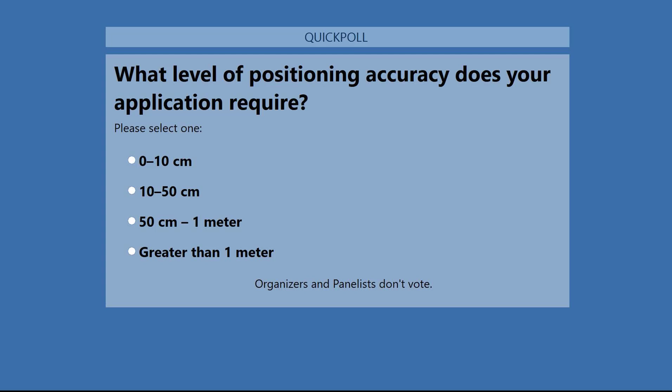Okay, looks like 55% saying 0 to 10 centimeters, 18% saying 10 to 50 centimeters, 25% of us saying 50 centimeters to 1 meter, and 2% saying greater than 1 meter. So, Alan, any thoughts here?

Well, with that commanding majority at 0 to 10 centimeters, we are in the machine control zone. That's not to say that the others with lesser requirements are not going to find plenty of valued information in this webinar. There are certain aspects of machine control also that involve the lesser accuracies, which is not to say that 1 meter of accuracy is anything to sneeze at.

Let's go ahead and hear from our first panelist. Lee Baldwin is the Director of Off-Road Autonomy at AutonomouStuff. He's responsible for creating and implementing the off-road autonomy product strategy that aligns with the AutonomouStuff mission and values. He spent the last 10 years as an engineering manager at Caterpillar, where he led development of the command and control portion of the autonomous hauling system.

Lee, we're all anxious to hear your presentation. Please go ahead. Thank you, Alan. Appreciate the introduction. So today I would like to spend about 15 minutes.

I'll talk a little bit about AutonomouStuff and its role with Hexagon. Then I would like to spend some time on onboard autonomy components in the subsystems that you'd find typically on any autonomous machine. Then I'll spend a bit of time on the perception subsystem, which is one, obviously, of the critical systems that you need in a robot, and talk about a real-world use case. This use case is going to flow through each of the speakers, autonomous hauling and mining, and lots of nuances. That was the first application, really, from an autonomy standpoint to kind of go mainstream. And then I'll finally talk about the road to production and how you would do that in the context of training perception systems.

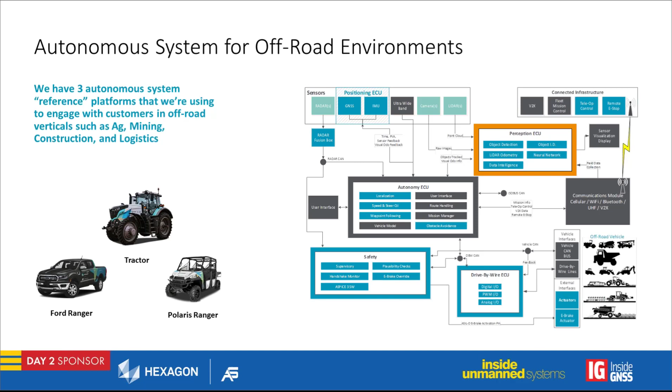So let's talk a bit more about perception in the vehicle platform. Typically you'll find some of these sensors on any autonomous machine, and depending on the use case and where it's being used, there'll be a stronger reliance on certain components. Obviously you'll find GNSS receivers and IMUs because position is very important for the autonomous machine.

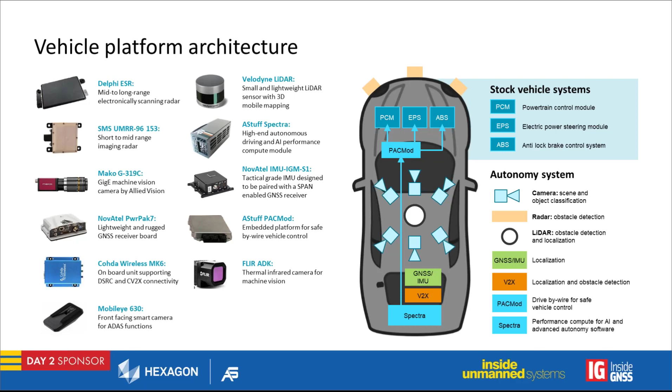But for the perception system, you'll see a variety of sensors potentially fused together. You could use cameras for object detection and categorization, but you can also do that with radar and LiDAR - depending on the environment, you may use one or all of those sensors. You'll also see a drive-by-wire system that interfaces with the machine systems and provides and gets feedback from them. So any machine, you'll see these things, and some interesting developments are with camera technology, like thermal cameras for night vision.

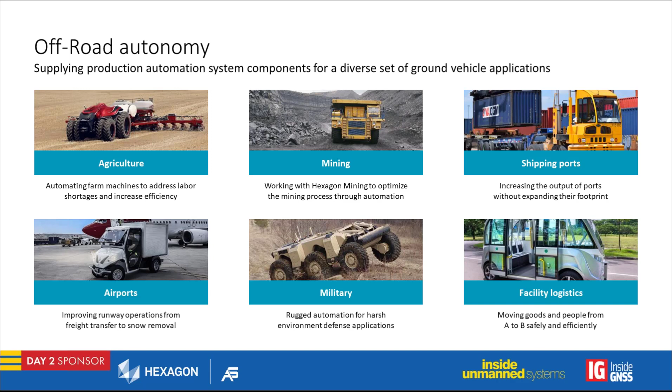Just some common components you'll see. Now for applications - we're talking about off-road autonomy today and where this is going. Obviously mining has been at the forefront. Agriculture has many startups working on robots because of labor scarcity. Shipping ports already use gantry cranes, but there's a push to automate other aspects. Airports, due to damage risks to airplanes, are automating certain vehicles around them. There are also a lot of military applications and facility logistics shuttles. One thing common to many of these, except airports, is that they can be enclosed environments.

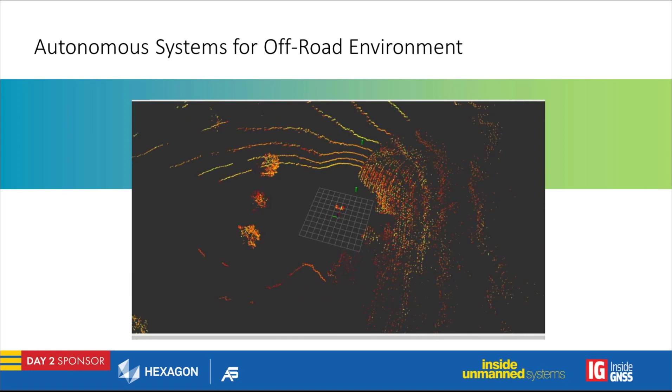So this is from an off-road environment - one of our research and development vehicles, a Polaris Ranger. This showcases our perception systems. In this case, this is the LiDAR point cloud coming out, and this is a thermal camera also used in perception.

This shows our drive-by-wire system actually controlling the Ranger with no safety driver. You'll see coming up that it stops - that's one of our engineering managers - and it will stop, avoid, automatically restart, and carry on. So that's some of the things we've done with off-road vehicles, but we've also done quite a few passenger vehicles as well.

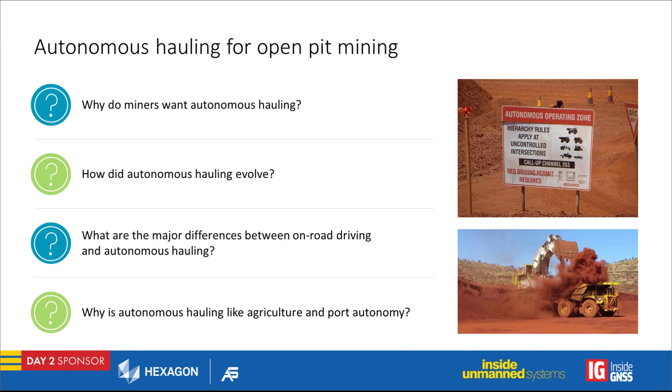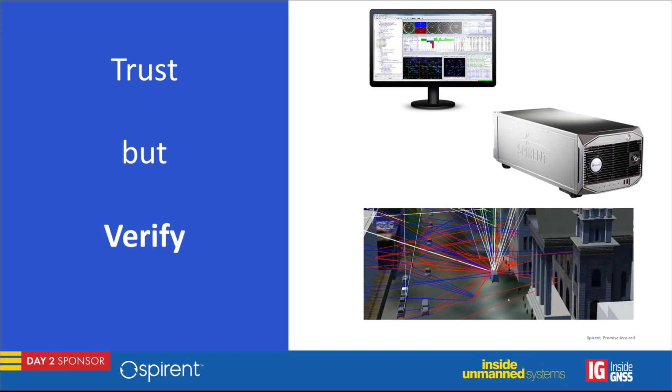So what we say here is that it is good to be aware of the receiver and sat-nav limitations, and yes, you should trust the position, but at the same time, you need to make sure that you verify that what you're getting is true.

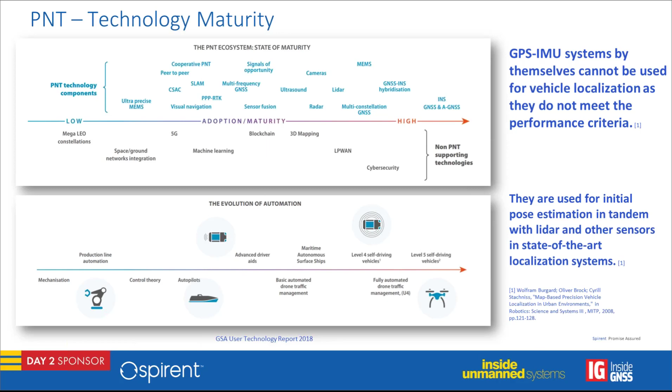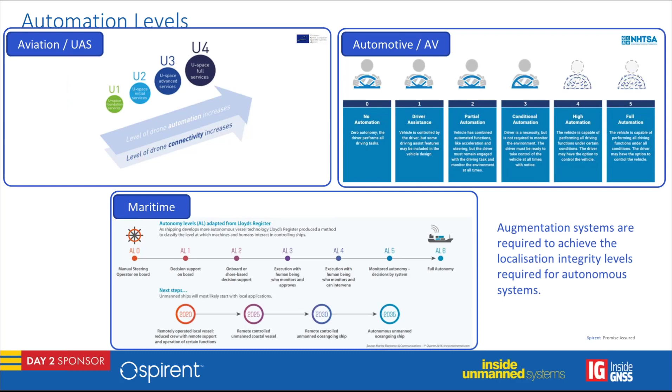In this chart, we're seeing the automation levels for different segments ranging from aviation, automotive, and maritime. What is common between these segments is that as the automation level increases, so does the system complexity. If we focus on positioning and localization, it becomes clear that augmentation systems are required to achieve the integrity levels required for such autonomous systems.

The good news is that there are already several market-available augmentation services such as RTK and PPP, or the combination of both. These compensate the satellite orbit errors and ionospheric and tropospheric delays. The downside is that such systems generally assume open sky and do not reflect obscuration, multipath, and receiver bias, which still need to be accounted for. These happen more often in dense urban environments, forests, and cliff faces. This will be discussed in more detail further on, and Ali in the second half can show you even more.

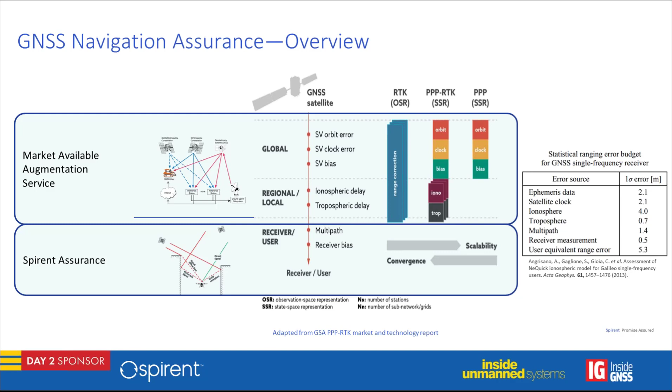As the levels of automation in vehicles increases, so does the complexity of the positioning engine. More traditionally, the positioning engine uses solely the GNSS receiver. This was eventually enhanced using motion sensors such as inertial measurement devices and odometry, and there are some very good implementations already in the market. However, this might not be good enough for certain applications, especially where environmental awareness is required for the positioning engine to assist in localization and map building.

To do so, other sensors such as camera, LiDAR, and radar also feed into the positioning fusion mechanism. This is generally required not only to have a level of redundancy, but also to improve the vehicle's estimated position with higher accuracy and the integrity required for high automation levels.

This is quite an interesting shift in the way we look at positioning and localization. The main shift is that rather than just focusing on getting a position and having humans decide if that position is accurate, now all of this has to happen through the positioning engine mechanism and the control system controlling the vehicle. As mentioned earlier, people make mistakes even when warned through signs—imagine if this system, which has to rely on the positioning available from the positioning engine, is not accurate.

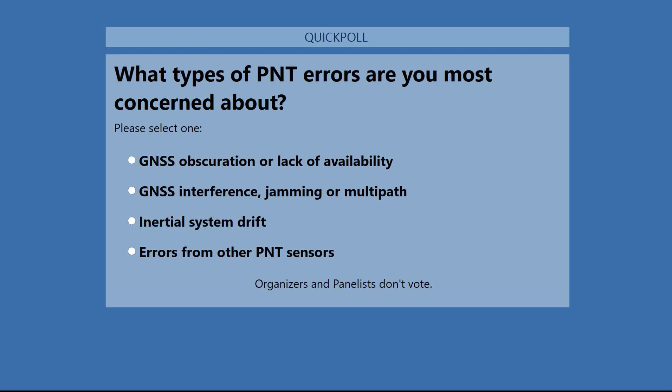Okay, it looks like 31% saying GNSS obscuration or lack of availability, 51% GNSS interference, jamming, or multipath, 15% inertial system drift, and 3% errors from other PNT sensors.

Thoughts here, Alan? Well, as I see in almost everywhere I look, whether it's at technical conferences or in private conversations with designers and engineers, interference, jamming, or multipath lead the concerns when we're talking about GNSS, followed by obscuration or lack of availability, just getting a good usable signal. Now, as you combine it with inertial, you have to govern your error budget in that respect as well, but it appears to be of less concern, at least at the moment.

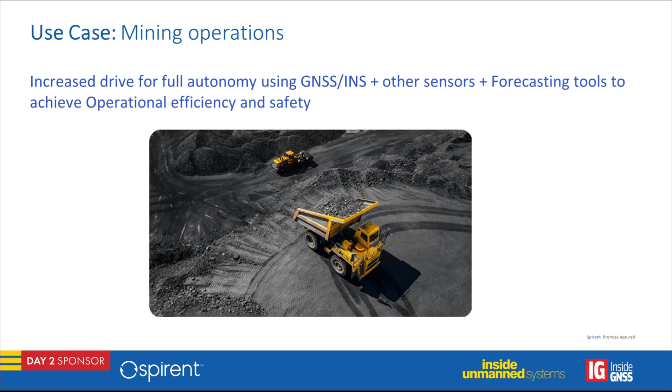Using GNSS in open pit mining has its own challenges that could significantly affect the precision and operation of the overall system. For mining, the demand is not just for positioning at a meter or so accuracy, but rather for precise positioning at centimeter level accuracy. The use of multi-frequency, multi-constellation GNSS receivers with correction data services solves for most of the typical GNSS errors and could enable centimeter level accuracy most of the time. But there remain some other challenges that affect the accuracy and continuity of the service.

Like we heard, multipath and obscuration remain a challenge in such environments. Obscuration of the GNSS signal occurs as the vehicle dives deep in the pit, causing fewer satellites to be visible to the system. Multipath could be generated from many sources. For example, the vehicle body carrying the receiver, moving or even static vehicles surrounding the receiver, and of course from other structures within the mine site. All those affect the accuracy of the system to a degree.

And then there is space weather. Space weather is another challenge, and specifically scintillation effects. Many mine sites are either on high latitude or equatorial regions, and this is a major issue because scintillation effect is mostly active in those two regions. I will discuss more on this later in this presentation.

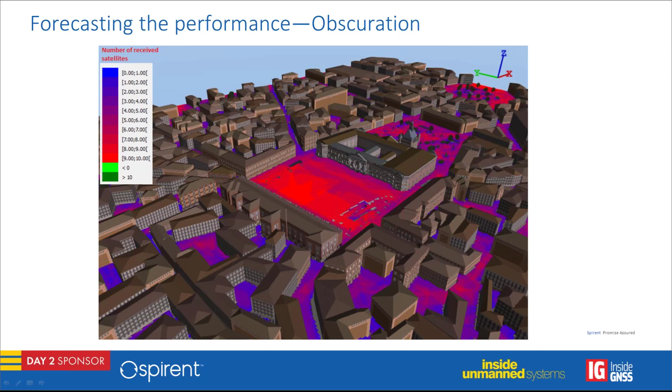What you see here is downtown Toulouse, France. The colors represent the number of line of sights available. Red means more line of sight, as in the case of the open square, where blue means less line of sight, as on the side roads. This example could easily be converted to an open pit mine site to predict the performance of the system and plan accordingly. Basically, GNSS forecasting takes the surprise out of positioning performance.

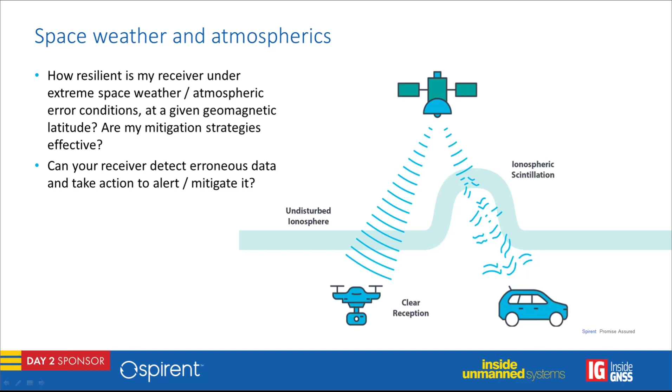The need for high positioning accuracy in mining, among other applications, led to increased focus on understanding and characterizing the different errors as a result of space weather and atmosphere. The GNSS signal travels 12,000 miles to Earth. Refraction and diffraction of the signal as it crosses the different layers of the atmosphere can result in delays and distortion of the signal. To ensure maximum availability and performance, such errors need to be mitigated for, or at least detected, to warn the system of a possible performance compromise.

Now let's discuss more about ionospheric scintillation. This is caused by localized fluctuation in the electron density of the ionosphere. This distorts the phase and amplitude of the signal. Typical receiver models are unable to solve for these errors due to the irregularities it causes to the ionosphere.

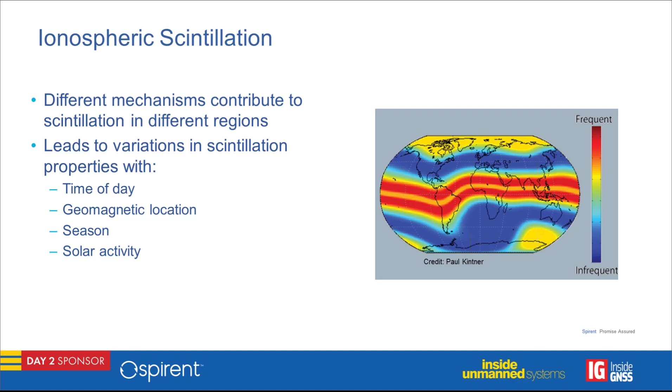There are many factors that lead to variation in scintillation properties, for example, time of day, geomagnetic location, season, and solar activity. In fact, the next solar max is expected to start in 2023, which is even more reason to test and ensure your system will cope well under strong scintillation conditions.

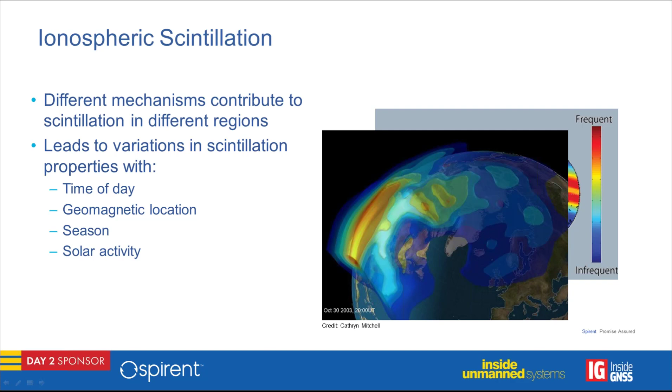Given the many errors and challenges highlighted in the previous couple of slides, it's important to test your system to establish the base performance post-integration, as well as tune the system for better performance. Testing could be done using different approaches, like Rafael highlighted, live sky for example, but such an approach is limited and provides no control or repeatability. It's for this reason simulation approach is ideal for such tests.

Using a GNSS simulator gives you the ability to control all the different parameters for the 3 different segments of any GNSS constellation. Any errors could be generated and injected in the scenario to enable good test coverage for typical or even rare errors like scintillation effects. A simulator could be used in conducted mode by connecting the device under test input directly to the simulator RF output, or even in over-the-air mode by radiating the RF signal over an antenna in a controlled environment to test the complete system, including the antenna.

We talked about correction data services a lot today, so obviously that's another important parameter, important output that your simulator should be providing. For most precise positioning applications, it's a big need. So using a GNSS simulator, RTCM correction data can be generated and driven to the device under test using different combinations of ways: serial or Ethernet port, or even NTRIP.

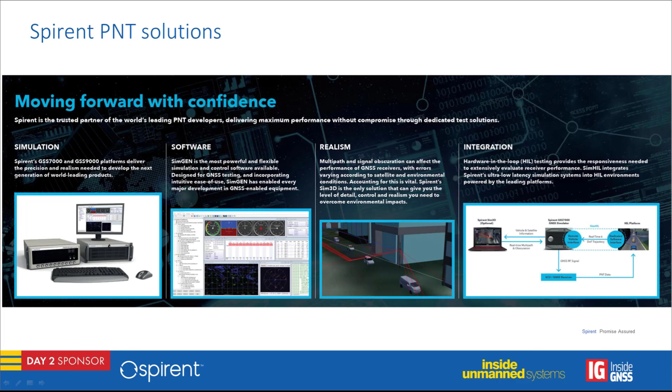Thank you, Ali. We're going to go into new territory now, talking about inertial technology. We'll hear from Alexis Guinamard, who is the Chief Technology Officer and co-founder of SBG Systems in France. SBG Systems is a supplier of miniature, high-performance inertial navigation systems. He holds a master's degree in embedded systems from École Centrale d'Électronique, and for the past decade at SBG Systems, he has led development of cutting-edge navigation algorithms, including AHRS, Attitude Heading Reference Systems, Inertial, GNSS, and more.

Alexis, please proceed. Thank you, Alan. So I will briefly present SBG Systems, and then we will dive into the machine control application, which is the topic of today. We will show you a new paradigm for orientation and position tracking, and we will end this presentation by talking also about even more challenging conditions and see what we can deliver for you.

SBG Systems is a French manufacturer of high-performance inertial systems that can be used for stabilization and navigation applications. Our headquarters are close to Paris, and we have subsidiaries in the USA and in Singapore. We have more than 700 customers and more than 25,000 inertial sensors on the field that are up and running.

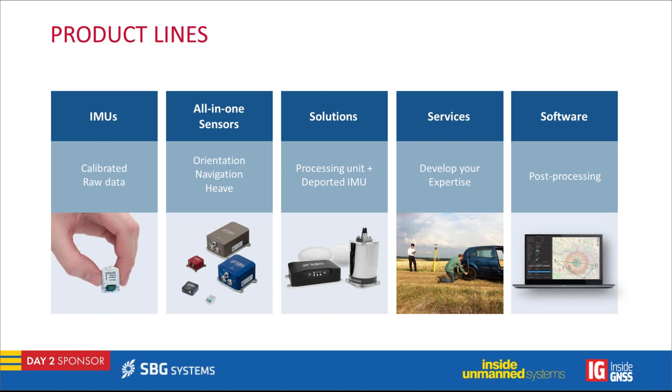Industry, offshore, marine science, camera pointing, antenna tracking, and many other applications. Regarding the products that we deliver, we have a large range of products from basic IMU, just delivering calibrated accelerometer or gyro data, up to all-in-one sensors, fully integrated GNSS, INS systems, but also solutions for survey applications. And finally, we have a post-processing software that is very efficient. We will talk about that later.

Now let's talk about machine control. Traditionally, if we look at the integration of different sensors in a typical machine control application, we have basic sensors like an orientation tracker that is used to track the orientation of the vehicle.

On the other side, for the position tracking, you use a GNSS receiver. Since you want to have a robust position and also you want to have a heading, sometimes you need a good GNSS receiver. So that's why mainly survey-grade GNSS receivers are used. They provide multi-frequency, they provide RTK for centimetric precision, and also they can provide dual antenna for heading.

In this kind of setup, you have simple subsystems. It works well in many situations, but still you have different sensors to install, and you have very expensive GNSS technology. And finally, since you don't integrate the GNSS and the IMU together, you don't have the best resilience during the GNSS outages.

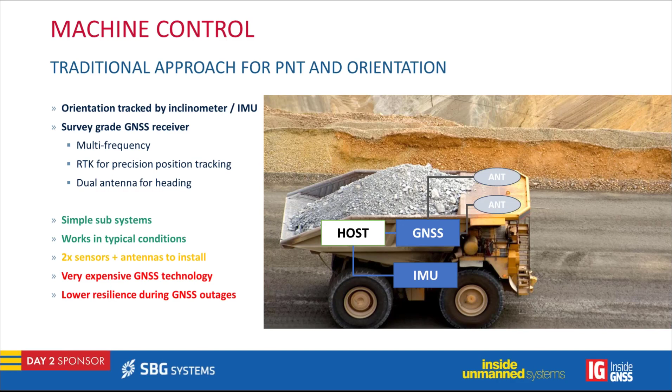Now let's talk about the very important technologies that need to be embedded into machine control applications. The GNSS part is key, of course. Up to now, you had two classes of GNSS receivers on the market. At first, you had the entry-level GNSS receivers that were only single frequency.

They were low cost, tracking only L1 band. Some of them were trying to do RTK or dual antenna heading, but they suffered from a very long convergence time, so their robustness wasn't good enough to meet machine control applications. On the other side, you have survey-grade GNSS receivers that are much more expensive because of their multi-frequency design and multi-constellations, but they deliver robust GNSS heading, robust RTK, and better immunity in case of multipath and jamming.

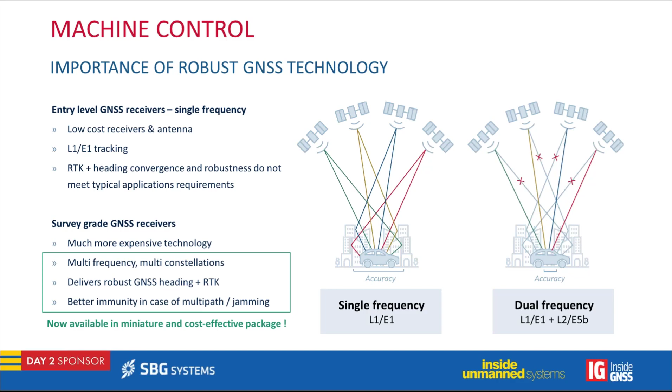The good news is that now you've got the same technology - multi-frequency, RTK, robust position, and so on - but with much smaller packaging and much more cost-effectiveness. So this is what we are trying to leverage on. You will see that.

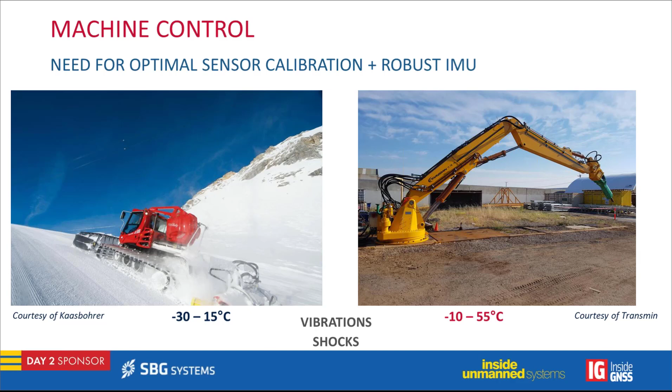So this is very important, to maintain a good performance level whatever the environment is. That's why we developed a very unique technology at SBG Systems and unique expertise to deliver consistent and optimal performance. First, over the full temperature range, we developed an improved calibration procedure using high-end calibration devices.

2-axis rotary tables with temperature chambers. All our sensors are calibrated using these specific tools. So that's a very key aspect of our technology.

But also it's important to make sure that we deliver good performance for every unit that we deliver. That's why during the production process, we have a screening process. We make sure that if one sensor fails at one specification parameter, we just won't deliver it. It's too important to make sure that all the sensors behave exactly the same.

And also over the full lifetime of the product, we select only industrial grade sensors with specific packaging in ceramic, or we also have an in-house qualification process to make sure that we will maintain the best performance over the full lifetime with no drift over time.

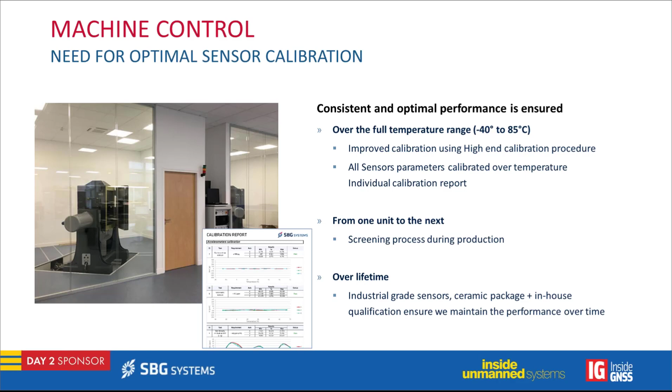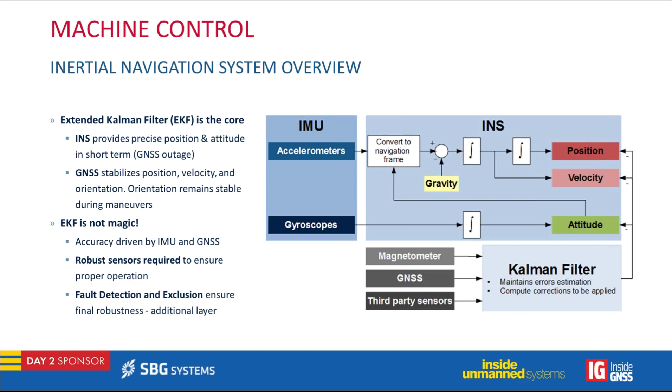So this is a specific technology that we developed at SBG Systems to make sure that we have robust navigation outputs. And here comes our new product.

Here I present the Ellipse D, the new Ellipse D, which can be very suitable for machine control applications. It can be integrated in many applications, of course, but for machine control, it's an excellent product. It integrates all the components that you need in a single package: a robust GNSS receiver with multi-frequency, RTK, dual antenna, robust IMU with best-in-class calibration, as I mentioned, and also a cutting-edge INS GNSS sensor fusion algorithm.

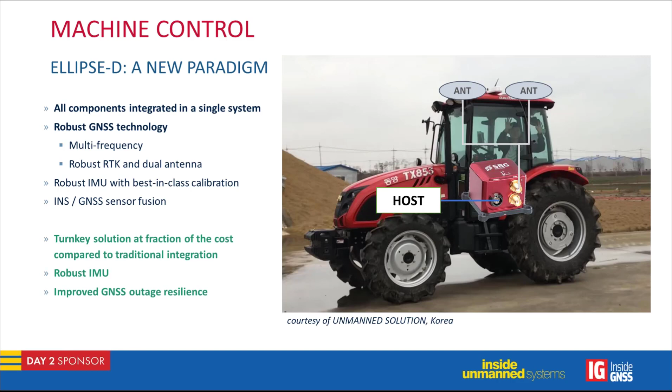So in order to get a very good position, you need only one sensor and two antennas to get your accurate position. This Ellipse D represents a turnkey solution and is delivered at a fraction of the cost compared to traditional integration that could be done up to now. So the key advantage of this product is also the small size. It is only a few centimeters wide, and also the integration between the GNSS and the IMU allows to improve the resilience in case of GNSS outage.

If we have a look at the advantages, as I mentioned, the GNSS is a very important aspect. Here we have quad constellations, dual frequency, RTK capability, which allows us to deliver reliable navigation even in difficult GNSS conditions. We also have dedicated motion profiles that minimize the position drift during outages. For instance, we have a truck or automotive motion profile for on-road applications. Also, we have specific tools like CAN bus outputs or automatic lever arm estimation.

We can fuse the inertial data with odometers like CAN bus odometers or pulse odometers. So this product is very interesting, also compatible with the ROS operating system with a specific driver and RT Maps for those who are integrating these softwares.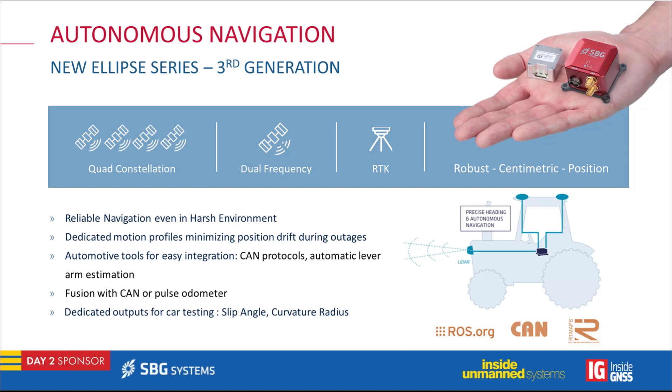But the Ellipse D is not alone. That's a complete line of products that can be also used in many other applications. On this full product line, we have a performance of 0.05 degree on the roll and pitch, and 0.2 degree on the heading, with also 1 centimeter precision on the position side.

Another very nice tool that I would like to highlight, even for machine control applications, is the Qinertia post-processing software. Traditionally, we use post-processing to get the ultimate performance in a forward, backward, and merge processing that is typically used in survey applications when you want to get the best performance. However, even for real-time applications, it can be very nice to use Qinertia as an analysis tool. You can replay your sensor data with different configurations to make sure that you have a proper setup.

Also, you can refine your lever arms using a specific calibration procedure. So even using this calibration procedure, you will be able to enter back the refined lever arm into your system firmware. And in that case, the real-time performance can be really improved. So that's a very interesting software, also to be coupled with machine control applications, especially during the R&D phase.

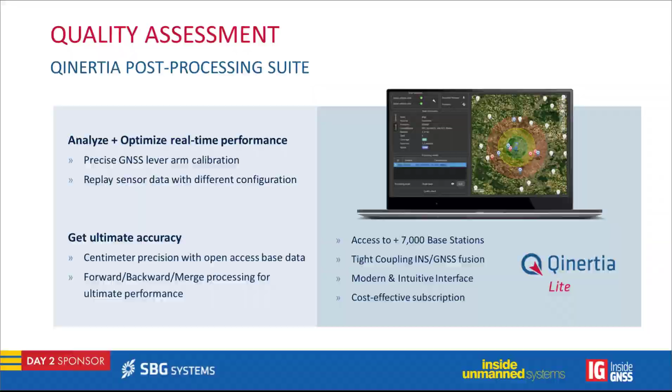Now we will see that even if you have more challenging conditions, we have also other solutions. If you have a need to get reference data, sometimes it is necessary if you have an autonomy project, or if you operate in an urban canyon environment. Whatever your autonomous platform is, we might have a good solution for you.

For these applications, we have higher performance products with dedicated algorithms. As I mentioned, specific motion profiles for automotive applications, tight coupling capable sensors. All of these products can run in real time or in post-processing.

So for the highest performance products, we have the NavSight series that can be delivered with multiple performance grades. We can range up to 0.004 degree on the roll and pitch, 0.008 degree on the heading. And this product will work very nicely with Qinertia post-processing software.

But we also have more compact products. If you already have a platform that you want a sensor to be integrated in, with the Ekinox, for instance, or even with the Quanta product line, which is maybe the best suitable option if you want to deeply integrate your sensor. So here it is an OEM based product, also provided with 2 levels of performance, very low power consumption, and capable also of doing real-time post-processing.